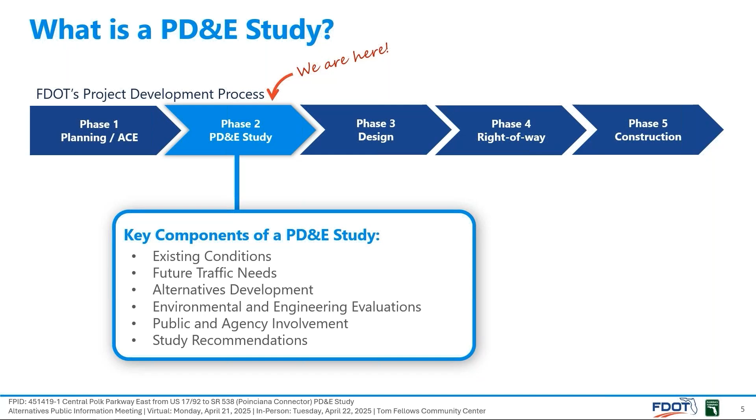The study area is located in northeast Polk County. The study limits begin on US 17/92 south of the Power Line Road extension intersection, which is currently under construction, and extends approximately 7 miles northeast to the future Poinciana Connector, which is under design and will connect State Road 538 to State Road 429. The CSX rail line borders the study area on the west side.

This PD&E study is evaluating a new tolled limited access highway from the extension of Power Line Road to the future Poinciana Connector. Access points are being evaluated with US 17/92 near Power Line Road, US 17/92 north of Ernie Caldwell Boulevard, and the future Poinciana Connector.

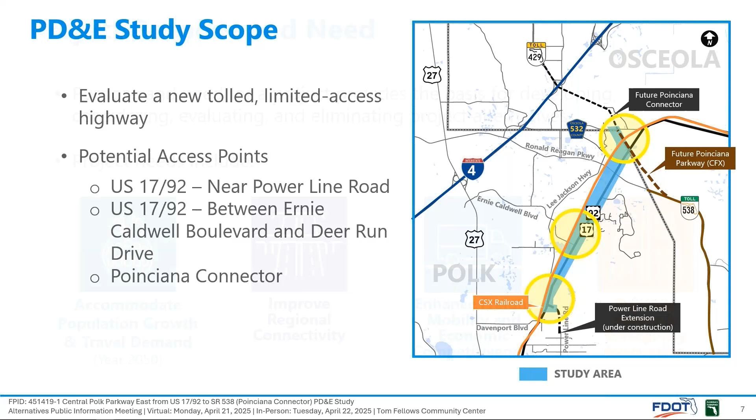The purpose and need for a project provides the basis for developing, considering, evaluating, and eliminating project alternatives. The need for the Central Polk Parkway East includes accommodating population growth and the associated travel demands, improving regional connectivity and overall system linkage, enhancing freight mobility and economic competitiveness, and enhancing safety, emergency evacuation, and response.

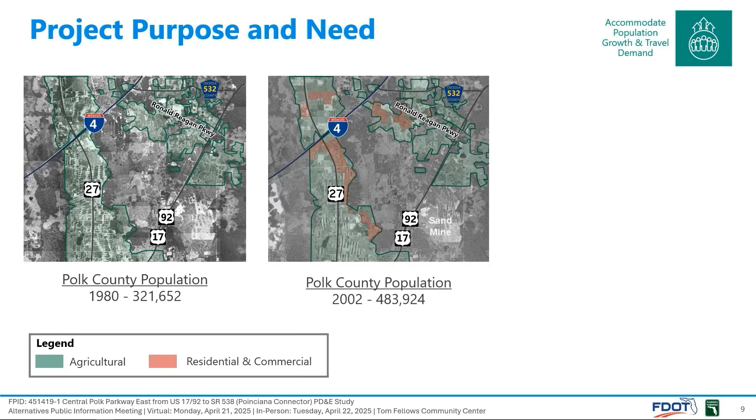Polk County continues to be one of the fastest growing counties in the nation. In 1980, the population of Polk County was just over 320,000 residents, and agriculture was a predominant land use, as indicated by the green shading. By 2002, the population had grown to just over 480,000 residents, and the transition of agricultural land uses to residential and commercial uses was underway, as depicted by the red shading.

The 2020 U.S. Census reported the Polk County population was just over 725,000 residents, a growth of 125%, and the red shading reflects the substantial urbanization of former agricultural areas. Polk County's population is expected to continue growing. Forecasts show that from 2020 to 2050, the number of Polk County residents will grow an additional 52%.

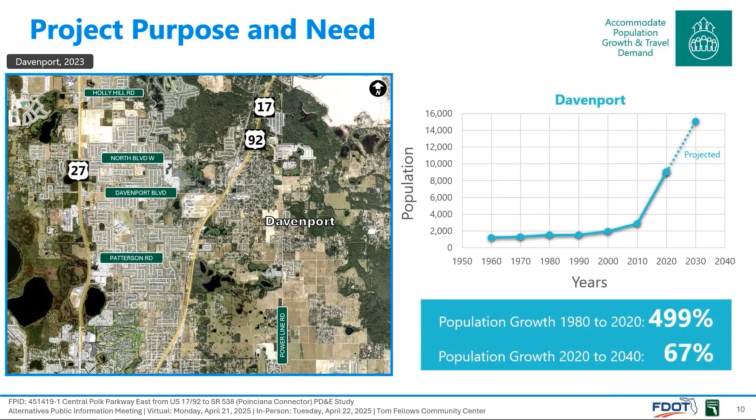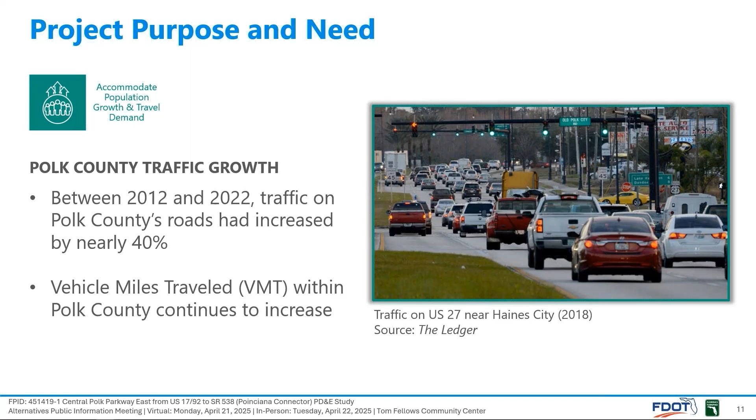Residential and employment growth within the county and throughout the region has increased the travel demand on the roadway network. Traffic on Polk County's roads increased by nearly 40% between 2012 and 2022, much faster than other counties in the region. Additionally, the total vehicle miles traveled within the county will continue increasing. The increased travel demand has led to congested roadways.

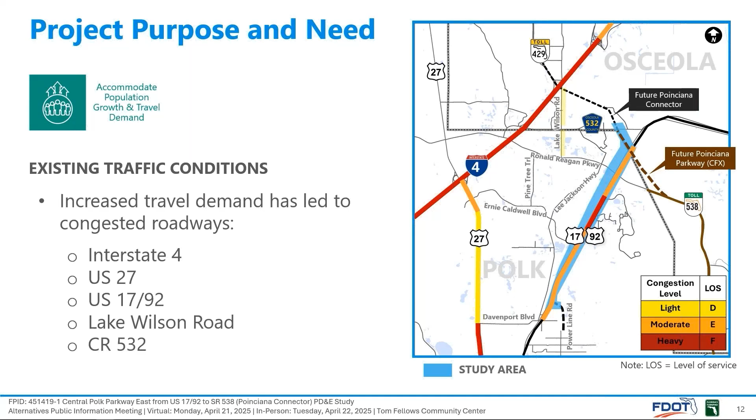Today, light, moderate, or heavy congestion is regularly observed on several major regional roadways, including Interstate 4, US 27, and US 17-92 during the peak travel periods. Congestion also occurs on Lake Wilson Road and County Road 532. The congested conditions on these major regional roadways will continue degrading if no improvements or alternative travel routes are constructed.

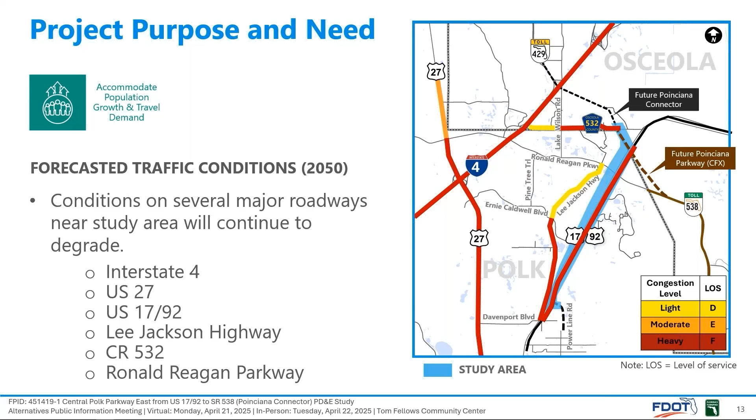In fact, heavy traffic congestion is forecasted for Interstate 4, US 27, US 17-92, Lee-Jackson Highway, County Road 532, and Ronald Reagan Parkway by the year 2050. There is a need to improve regional connectivity and relieve congestion on the local roadway network.

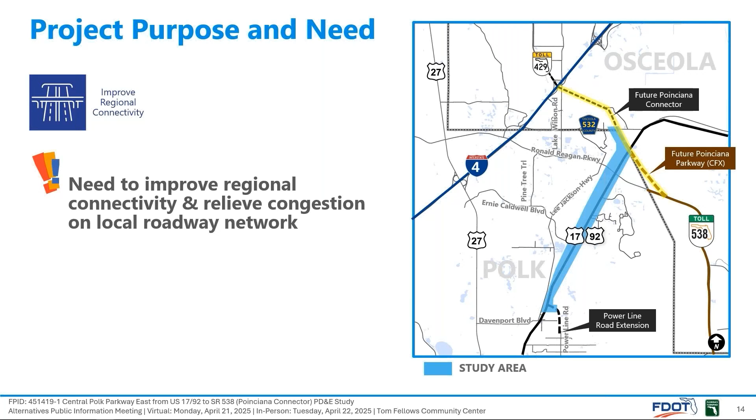Several projects to link the Poinciana Parkway to Interstate 4 are under development, one being the future Poinciana Connector. The proposed Central Polk Parkway East project will connect with the future Poinciana Connector, providing the Davenport area a higher speed option to get to and from Interstate 4 and State Road 429.

With more than 13 million Florida residents living within 100 miles of Polk County, the county's transportation system plays an important role in supporting regional and statewide goods movement. According to 2023 data, Polk County supports more than 81 million square feet of freight-related land uses, more than twice that of nearby counties. The Intermodal Logistics Center in Winter Haven is a major freight activity center with the capacity to process up to 300,000 containers per year. There is a need to improve the overall circulation of freight and goods and support economic development within the area.

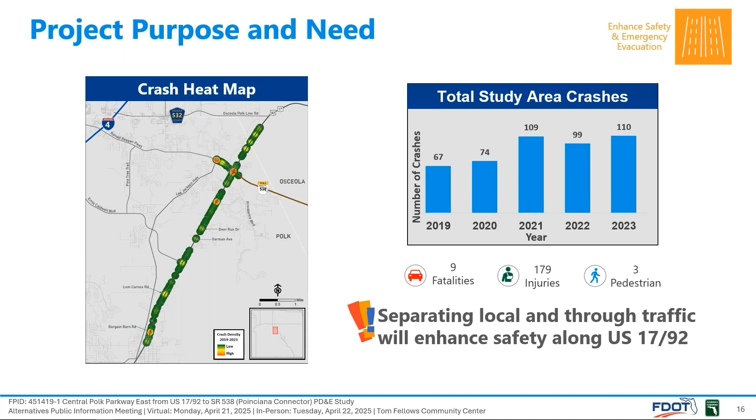Historical crash data between 2019 and 2023 show a total of 459 crashes occurred on US 17-92 within the study area, resulting in 9 fatalities and 179 injuries. Separating the local and regional traffic will reduce opportunities for crashes, thereby enhancing safety along US 17-92. Lastly, there is a need to improve the local and regional travel routes to help reduce emergency response times and enhance mobility during major emergency events.

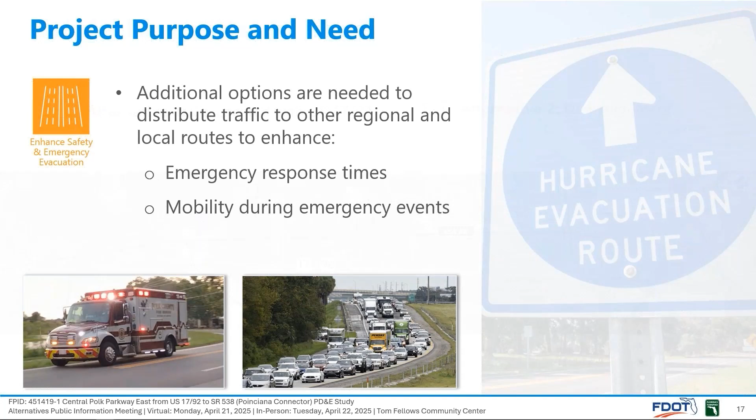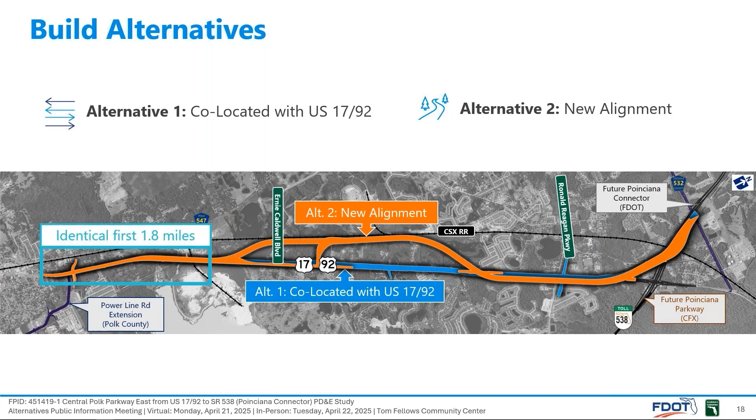North is now oriented to the right on these slides. 2 build alternatives were developed to meet the project's purpose and need: the co-located with US 17-92 alternative, which means the Central Polk Parkway East and the US 17-92 lanes are co-located within the same right-of-way footprint, and the new alignment alternative, which separates the Central Polk Parkway East from the US 17-92 corridor. The 2 alternatives are identical for about the first 2 miles. Now we will provide details on the 2 project alternatives, starting with the co-located with US 17-92 alternative.

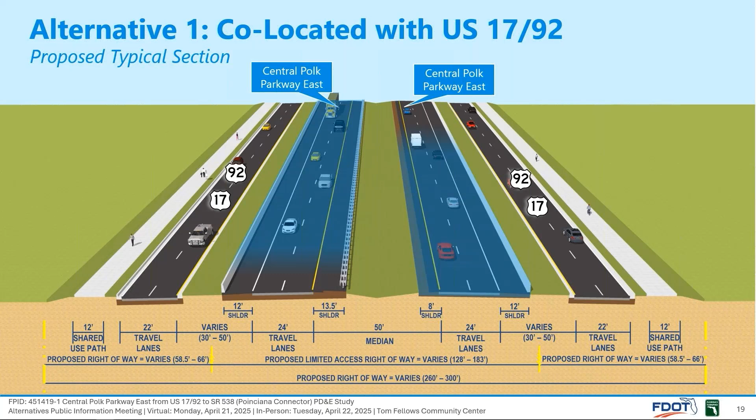The proposed typical section for the co-located with US 17-92 alternative features Central Polk Parkway East as a 4-lane limited-access highway. US 17-92 is reconstructed as a 4-lane frontage road to maintain safe access to adjacent properties and serve local traffic circulation. Shared use paths are provided along both sides of the project to safely accommodate bicyclists and pedestrians. While the existing US 17-92 right-of-way is 100 feet wide, the proposed right-of-way width for this alternative requires between 260 and 300 feet.

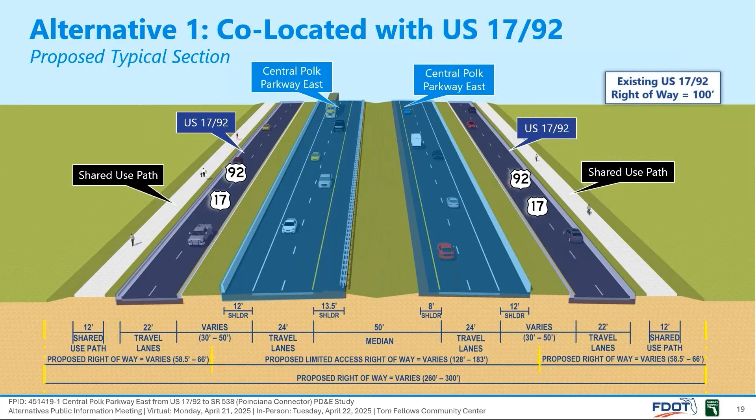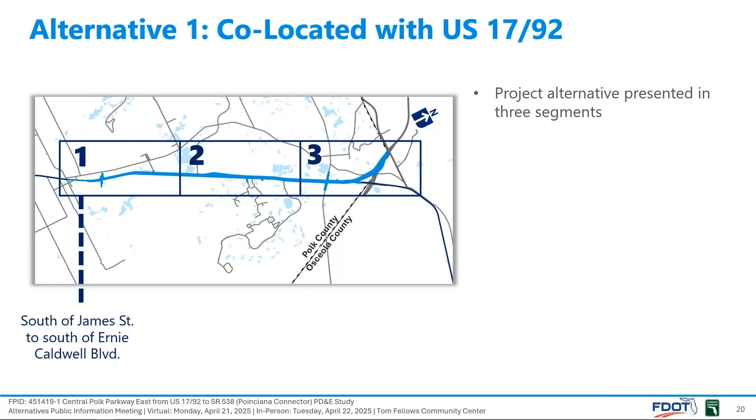We have divided the study area into 3 segments to provide an overview of the project alternatives. North is now oriented to the right on these slides. Segment 1 extends from south of James Street to south of Ernie Caldwell Boulevard. Segment 2 covers from south of Ernie Caldwell Boulevard to north of Providence Boulevard. And Segment 3 extends from north of Providence Boulevard to the future Poinciana Connector.

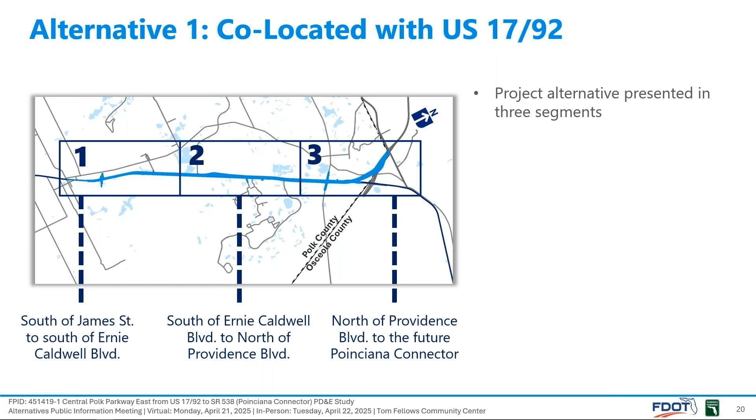The following slides provide an overview of major roadway features, potential access points to and from the proposed highway, overpass locations, and potential right-of-way impacts. To view the project alternatives in greater detail, please refer to the project exhibits posted on the project website or on display at the in-person meeting.

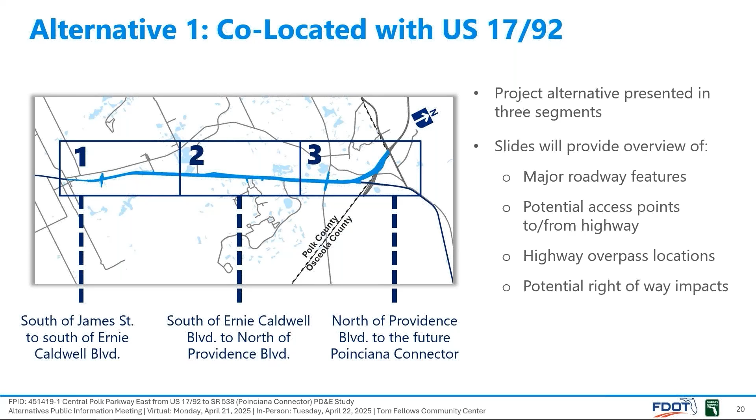The project starts with upgrades to US 17-92 just north of James Street and continues to the north. The US 17-92 intersection with Power Line Road, which is currently under construction by Polk County, is upgraded to accommodate the higher traffic volumes and connect with the proposed realignment of Bargain Barn Road.

Access to and from the proposed new highway occurs north of Power Line Road, after which the highway will be co-located with US 17-92. The highway lanes will be in the center with overpasses at select locations, while US 17-92 will remain at grade. In the northbound direction, US 17-92 widens to 3 lanes to create the slip ramp lanes that form the Central Polk Parkway East highway.

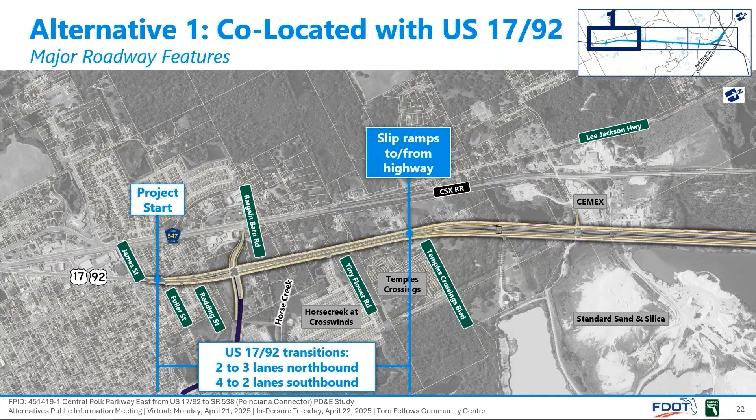While in the southbound direction, after receiving the 2 slip ramp lanes from the Central Polk Parkway East, US 17-92 southbound tapers down from 4 lanes to 2 lanes, and further narrows to 1 lane south of the Power Line Road intersection. Northbound drivers wanting to enter the highway will use a slip ramp on the inside lane of US 17-92.

Southbound drivers exiting the highway will merge onto southbound US 17-92. The highway lanes will bridge over Lem Carnes Road and the CSX Railroad Spur to help maintain higher travel speeds and accommodate safe local circulation. The US 17-92 lanes will remain at grade.

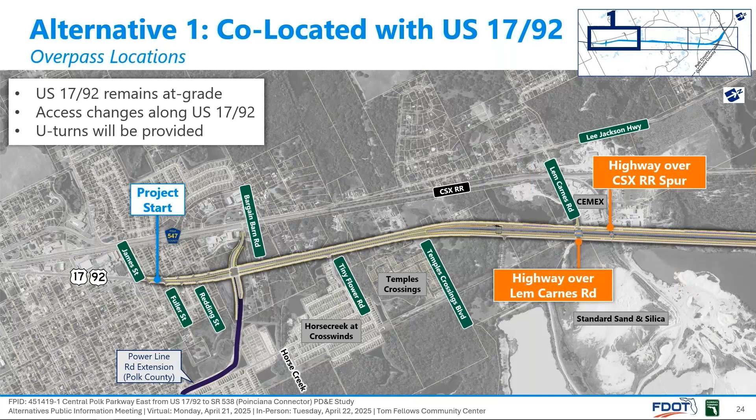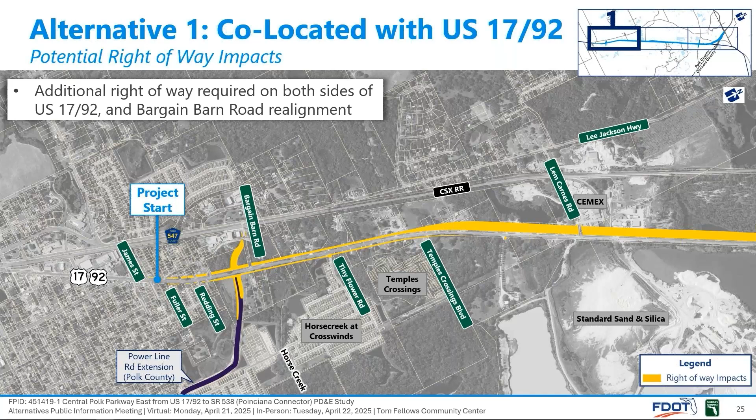There will be access changes along US 17-92. Locations to safely perform U-turns will be provided. Additional right-of-way will be required on both sides of US 17-92 to construct the proposed highway. Please refer to the project exhibits posted to the project website or on display at the in-person meeting to see potential impacts.

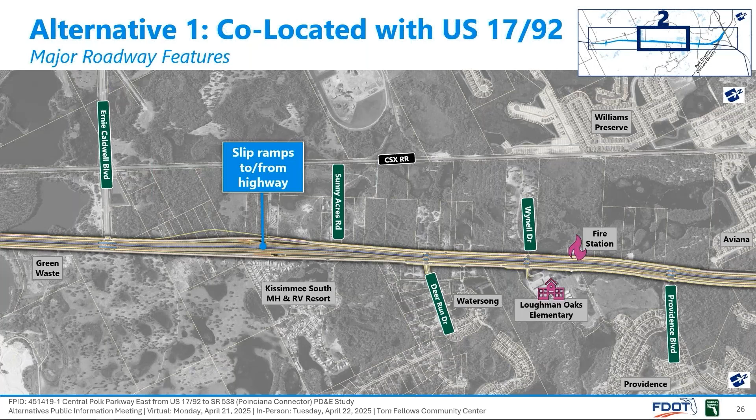We now move to Segment 2 of the co-located with US 17-92 alternative. This segment extends from south of Ernie Caldwell Boulevard to north of Providence Boulevard. The co-located highway continues north along US 17-92. Slip ramps to accommodate access between the highway and the frontage road are provided just north of Ernie Caldwell Boulevard. Similar to the first access points, northbound drivers wanting to enter the highway north of Ernie Caldwell Boulevard will use a slip ramp on the inside lane of US 17-92.

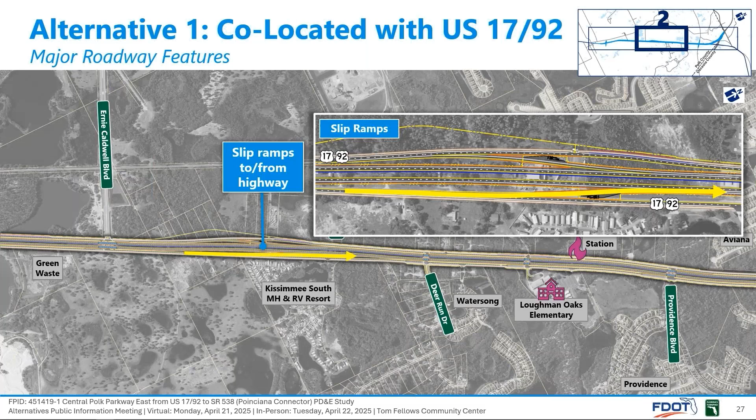Southbound drivers wanting to exit the highway will use a slip ramp to exit and merge onto southbound US 17-92. In Segment 2, the highway bridges over Ernie Caldwell Boulevard, Deer Run Drive, Wynell Drive, and Providence Boulevard. US 17-92 will remain at grade. There will be access changes along US 17-92. Locations to safely perform U-turns will be provided.

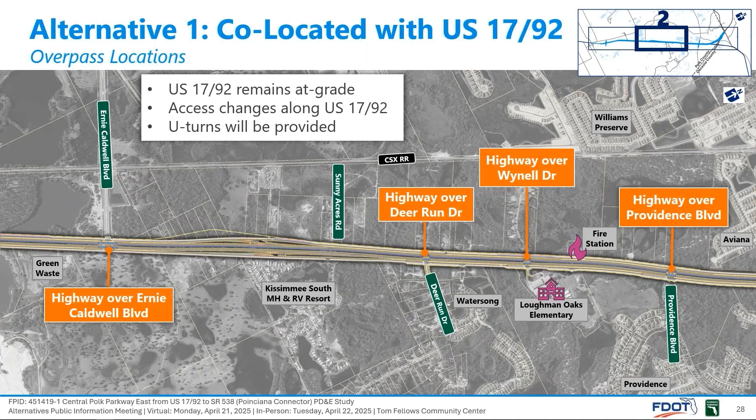The access changes along US 17-92 will affect the Loughman Oaks Elementary School. The bus loop access will remain as it is in the existing conditions. Drivers will be able to turn left and right onto US 17-92. Access at the parent pickup location will change to right out only. Drivers wanting to travel southbound on US 17-92 will be able to make a U-turn at the Providence Boulevard intersection.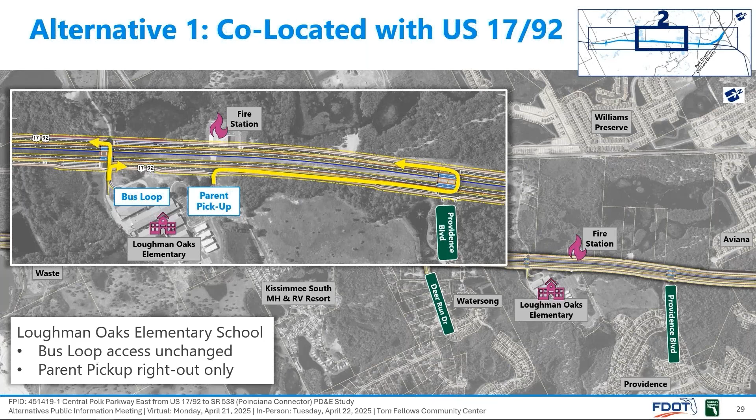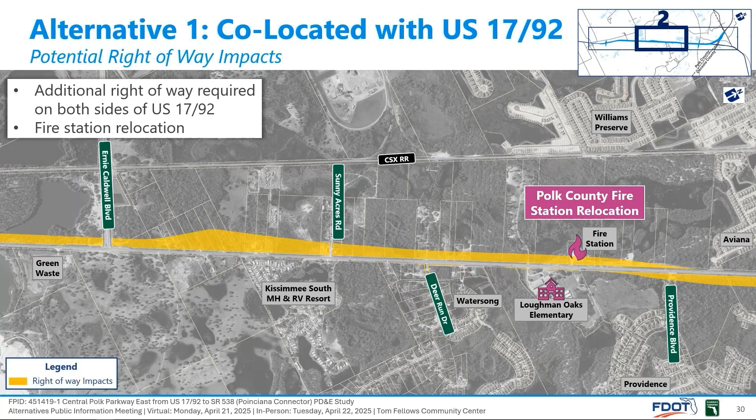Additional right-of-way will be required on both sides of US 17-92 to construct the proposed highway and results in a relocation for the Polk County Fire Station. Please refer to the project exhibits posted to the project website or on display at the in-person meeting to see potential impacts.

We will now move to Segment 3 of the co-located with US 17-92 alternative. This area extends from north of Providence Boulevard to the future Poinciana connector. The co-located highway continues north along US 17-92. North of Ronald Reagan Parkway, the highway lanes separate from US 17-92. The northbound ramp provides a high-speed connection to the Poinciana connector and ultimately State Road 429 and Interstate 4. The southbound lanes provide a high-speed connection from the Poinciana connector. The US 17-92 lanes will continue north, separate from the highway.

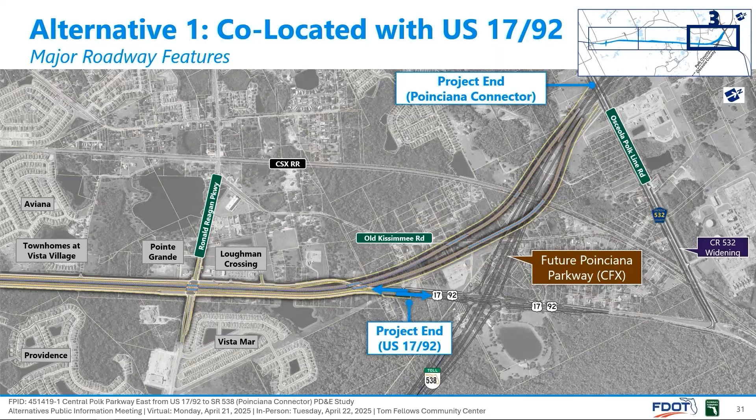This project ends on US 17-92 just before a future Poinciana Parkway interchange that will be completed by the Central Florida Expressway Authority. In Segment 3, the highway bridges over Ronald Reagan Parkway. Once the highway separates from US 17-92, the highway bridges over US 17-92, Old Kissimmee Road, the CSX Railroad, and the future Poinciana Parkway. There will be access changes along US 17-92. Locations to safely perform U-turns will be provided.

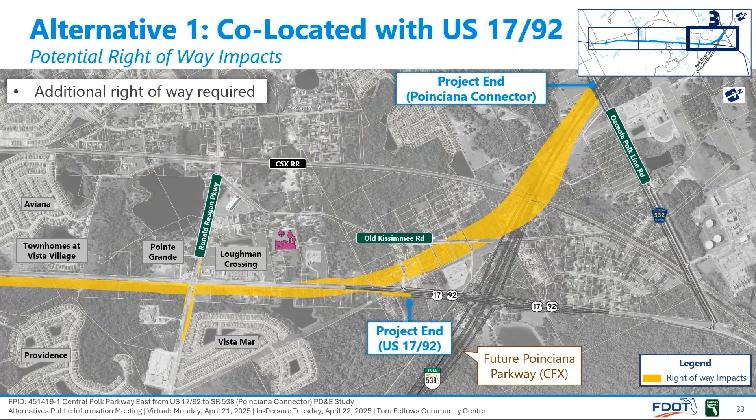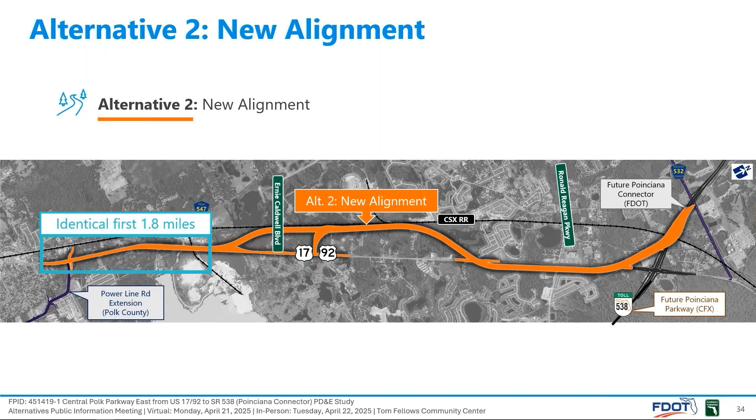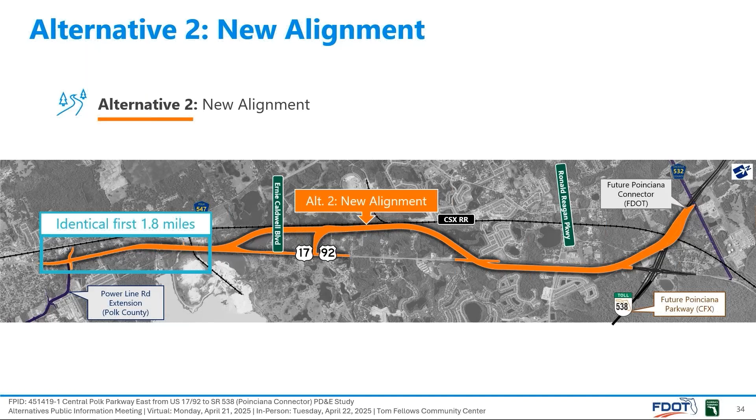Additional right-of-way will be required in this segment of the project. Please refer to the project exhibits posted to the project website or on display at the in-person meeting for potential impacts. The second build alternative is the new alignment alternative. The first 1.8 miles of the new alignment alternative are the same as the co-located with US 17-92 alternative, after which it diverges from the US 17-92 median through the central part of the study area. Now we will provide additional details on the new alignment alternative.

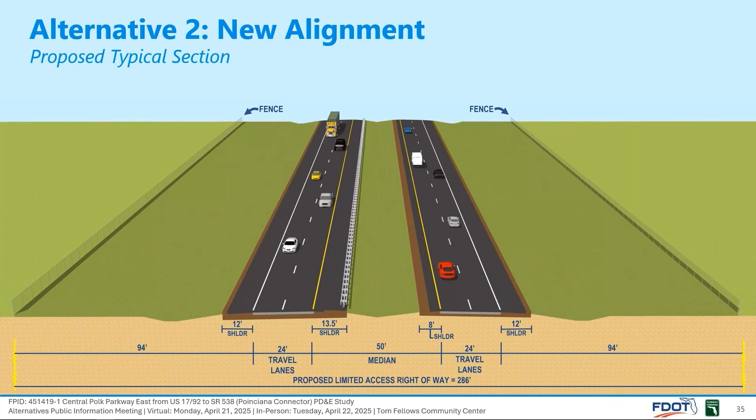The typical section for the new alignment alternative proposes a 4-lane limited access highway consisting of two 12-foot wide travel lanes in each direction, separated by a 50-foot wide median. Shoulders of varying widths are provided along the inside and outside travel lanes in accordance with FDOT design criteria. The total proposed limited access right-of-way width for this alternative is 286 feet.

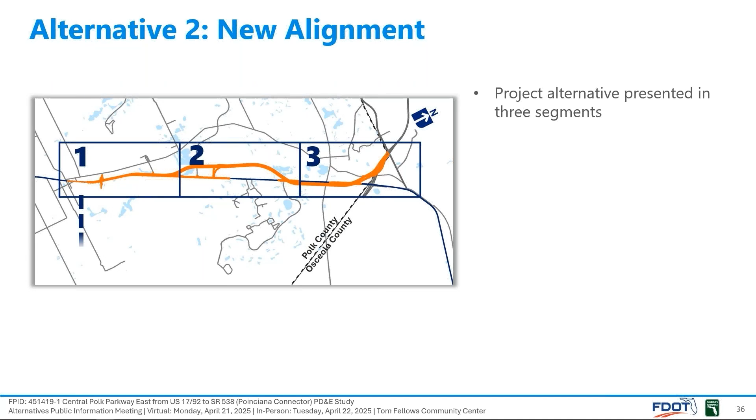For the new alignment alternative, the study area was divided into the same 3 segments as before. The first segment is from south of James Street to south of Ernie Caldwell Boulevard. The second is from south of Ernie Caldwell Boulevard to north of Providence Boulevard, and the third from north of Providence Boulevard to the future Poinciana connector. As a reminder, graphics on the slides are oriented with north to the right.

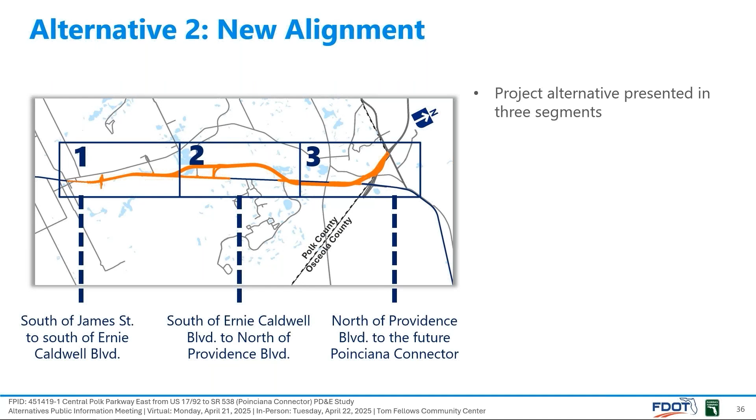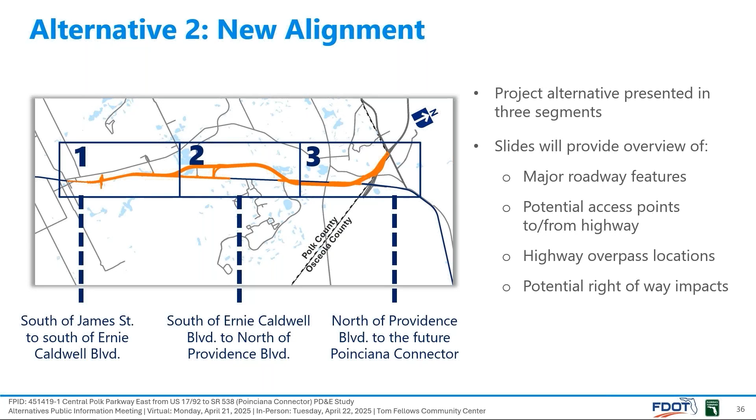The slides will provide an overview of major roadway features, potential access points to and from the proposed highway, overpass locations, and potential right-of-way impacts. To view the project alternatives in greater detail, please refer to the project exhibits posted to the project website or on display at the in-person meeting. The proposed improvements would start on US 17-92 north of James Street and continue to the north along US 17-92. Bargain Barn Road would be realigned to join the Powerline Road intersection.

Access to and from the proposed highway would occur north of Powerline Road, after which the highway would be co-located with US 17-92 for a short distance. This new alignment alternative separates the highway from US 17-92 north of Lem Carnes Road. The highway would bridge over select roadways and environmental features.

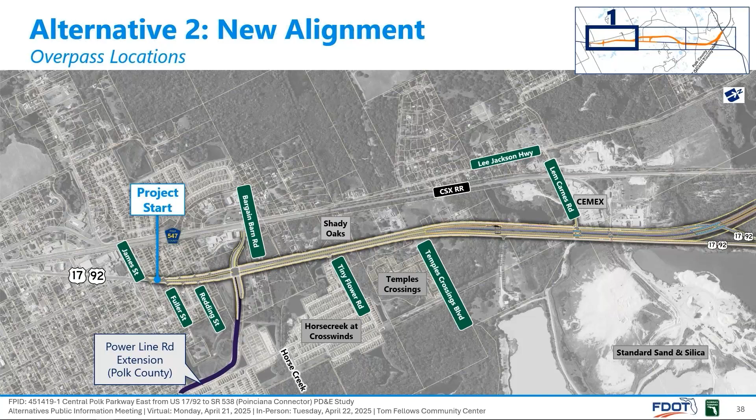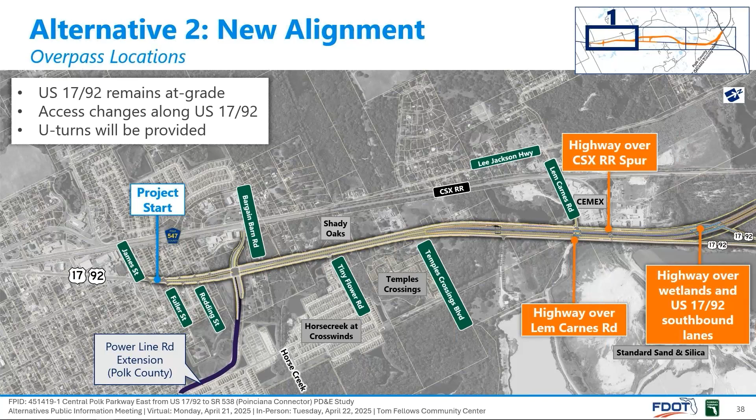In Segment 1, the highway would bridge over Lem Carnes Road and the CSX Railroad Spur. After the highway separates from US 17-92, the highway would bridge over the southbound US 17-92 lanes and wetlands. US 17-92 would remain at grade. There will be access changes along US 17-92. Locations to safely perform U-turns will be provided. Additional right-of-way will be required on both sides of US 17-92 to construct the proposed highway.

Please refer to the project exhibits posted to the project website or on display at the in-person meeting to see potential impacts. We will now move to Segment 2 for the new alignment alternative. This segment covers from south of Ernie Caldwell Boulevard to north of Providence Boulevard. The proposed highway would continue in a northwest direction until it runs parallel to the CSX Railroad. It would then cross back to the east of US 17-92 north of Providence Boulevard.

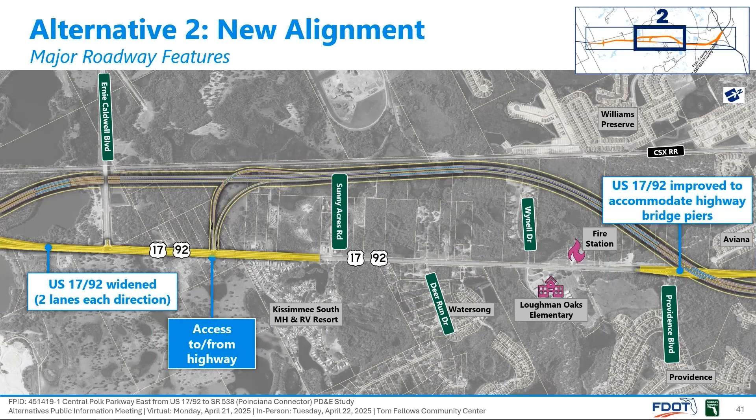Access to and from the highway is provided north of Ernie Caldwell Boulevard. Interchange ramps will serve northbound on and southbound off access. US 17-92 would be widened to 2 lanes in each direction, to north of the interchange ramps. Improvements to US 17-92 to accommodate bridge piers as the highway crosses over US 17-92 would be required at Providence Boulevard. The remainder of US 17-92 in Segment 2 will remain in the existing condition. This alternative does not impact the Loughman Oaks Elementary School or the Polk County Fire Station.

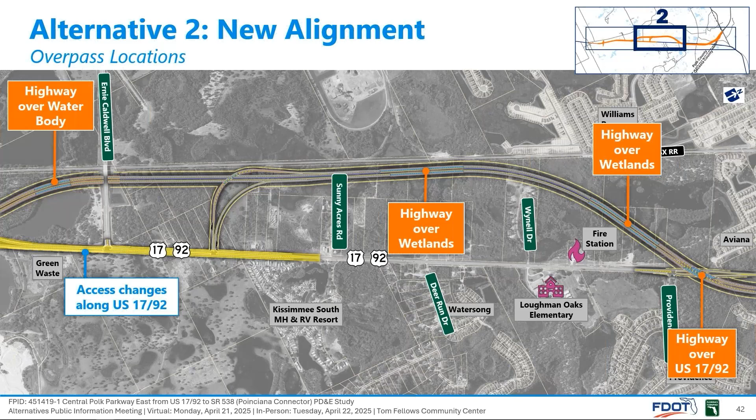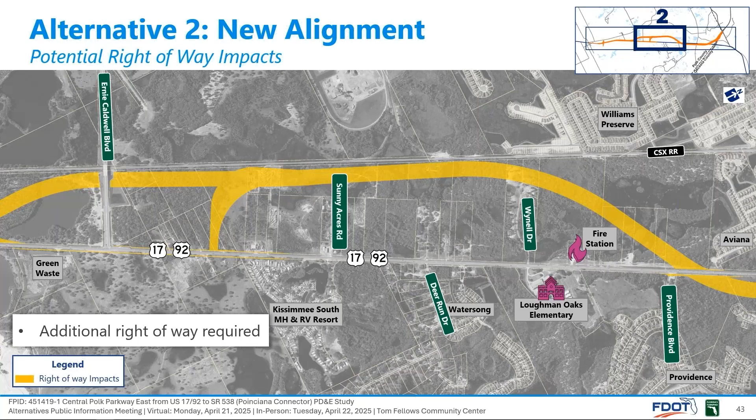The highway will bridge over water bodies and wetlands and US 17-92. Access along US 17-92 would change where the roadway is proposed to be widened. The improvements along US 17-92 at Providence Boulevard will not change the access. Drivers will still be able to turn left into and out of the Providence community. Additional right-of-way will be required for this segment. Please refer to the project exhibits posted to the project website or on display at the in-person meeting to see potential impacts. We will now move to Segment 3 for the new alignment alternative.

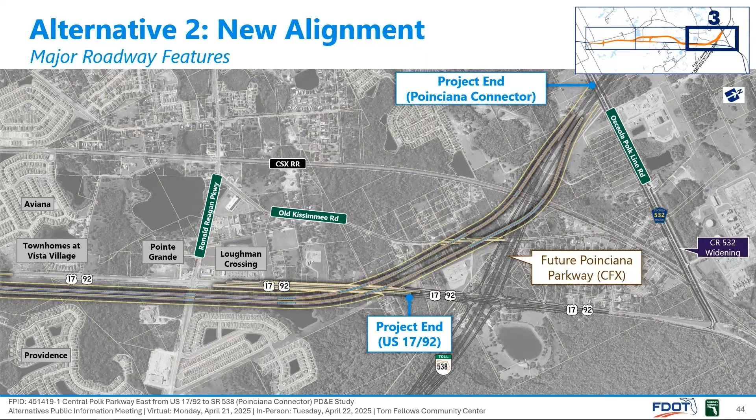This area is from north of Providence Boulevard to the future Poinciana connector. The proposed highway continues separate to US 17-92 to Poinciana Parkway. North of Ronald Reagan Parkway, US 17-92 is widened to 2 travel lanes in each direction. This project ends on US 17-92 just before a future Poinciana Parkway interchange that will be completed by the Central Florida Expressway Authority. The proposed highway will be on a new alignment, separate to US 17-92. Because the proposed highway would be separate to US 17-92, the only access changes along US 17-92 would be where the roadway is widened to 2 travel lanes in each direction.

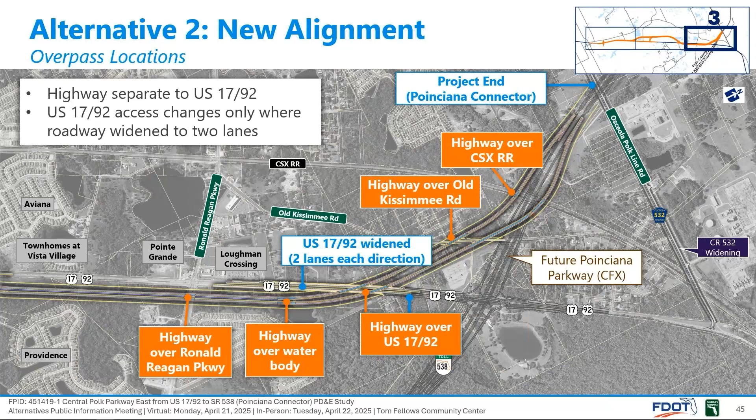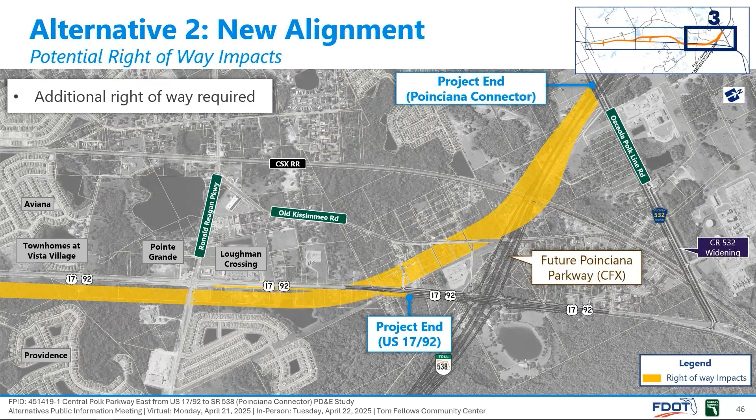In Segment 3, the highway would bridge over Ronald Reagan Parkway, a water body, US 17-92, Old Kissimmee Road, the CSX Railroad, and the future Poinciana Parkway. Additional right-of-way will be required for this alternative. Please refer to the project exhibits posted to the project website or on display at the in-person meeting to see potential impacts. The no-build alternative is an option that is also being considered.

This alternative assumes no improvements other than routine maintenance through 2050. Advantages of the no-build alternative include no environmental impacts, no additional right-of-way acquisition, and no construction costs. Disadvantages of the no-build alternative include increased traffic congestion, slower emergency response times, and inefficient emergency evacuation. Additionally, it does not accommodate future growth or economic development. It does not create a safer travel environment, nor does it meet the project's purpose and need.

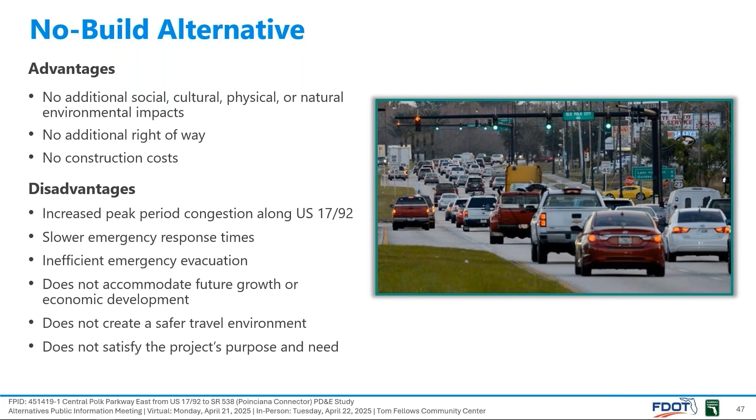Now that we have covered the alternatives, we will review the environmental considerations. As part of the study, Florida's Turnpike Enterprise will evaluate the potential social, natural, physical, and cultural effects of the project alternatives. Every effort will be made to avoid, minimize, or mitigate any adverse environmental impacts. Results of our environmental evaluations, including the consideration of potential wildlife crossings and a detailed traffic noise analysis, will be available for public review.

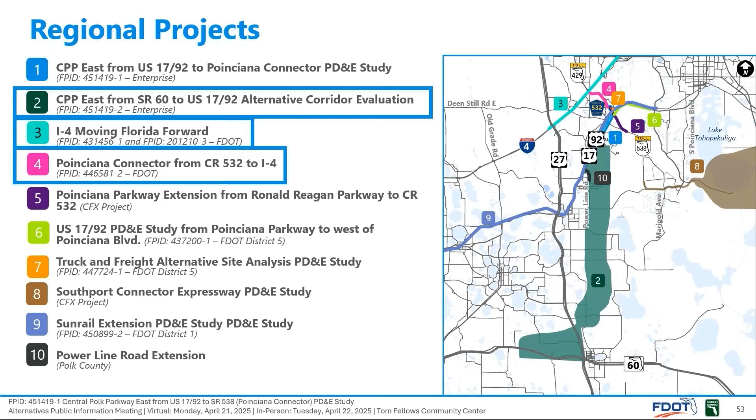The proposed Central Polk Parkway East projects would link to State Road 429 and Interstate 4 via the future Poinciana Connector, and provide relief to US 17/92, US 27, and other area roadways. Drivers would experience significant travel time savings.

After the Alternatives Public Information Meeting, we will select a build alternative based on public input and engineering and environmental analysis. Then it will be refined into a preferred alternative and presented at the public hearing, which is scheduled for the fourth quarter of 2025. Following the hearing, the project will be submitted for approval, with an expected completion date in the first quarter of 2026. Please note that this schedule is subject to change.

We need your feedback. You can provide comments at the project website, centralpolkparkwayeast.com. If you attend in person, you can complete a printed comment form. You may also email the project manager directly or submit your comments by U.S. mail to the project manager. While written comments and questions are accepted at any time, we ask that you provide comments that you may have in connection with this public meeting by May 2nd, 2025.

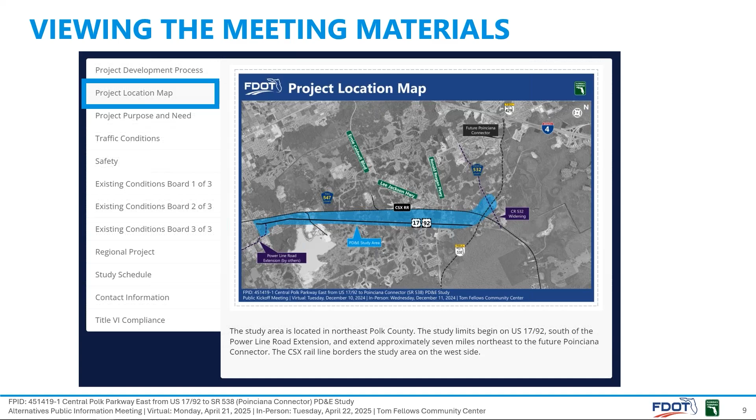So now let's start answering questions, Nathan, that were submitted when folks registered to attend the virtual meeting. Question 1: is this between US 17/92 and County Road 547, which is also known as Lake Hatchineha Road or Lee-Jackson Highway, and where does it extend to?

So, yeah, the proposed improvements start along US 17-92, just south of the Power Line Road extension intersection that is currently under construction. And they extend about 7 miles to the northeast along 17-92, ultimately connecting to the future Poinciana connector. Now, our study area, as we showed in the presentation, generally parallels 17-92 and is bound on the west side by the CSX Railroad. So technically, this project all lies between 17-92 and Lee-Jackson Highway.

Thank you, Nathan. The next question. Question 2, are there any plans for putting more lighting on US 17-92 and traffic lights near Aviana Resort? So regarding roadway lighting, full lighting analysis will be done during the final design phase to determine exactly what type of lighting needs to be provided along 17-92 and the Central Polk Parkway. Now, as far as traffic signals are concerned, you'll see on our alternatives that we are proposing a handful of new traffic signals, but every signal that's out there today will continue to be in place with either alternative.

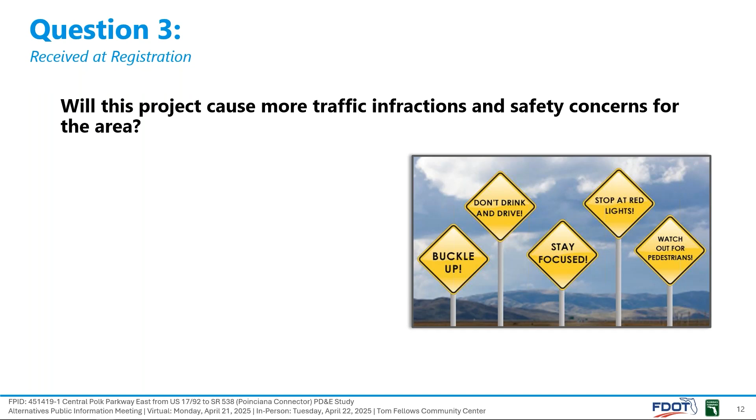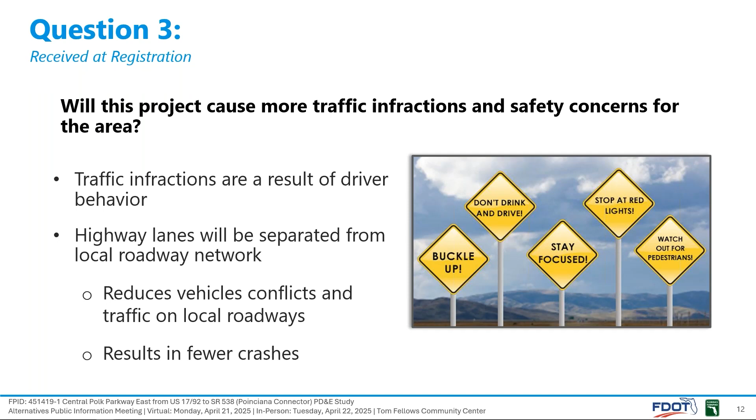Thank you. Question 3, will this project cause more traffic infractions and safety concerns for the area? So traffic infractions are really more of a driver behavior and how the drivers operate. But we are going to separate the longer distance travel; the higher speed, longer distance travel will be on the Central Polk Parkway expressway lanes. Those are the trips that are going to be traveling through the study area to I-4, 429, and places beyond that, where 17-92 will maintain the local travel service. So we believe that separating those two travel modes will produce much safer conditions, fewer opportunities for crashes.

Next, will there be a start and finish date set soon, Nathan? So currently, there is no timeline for construction. However, once the preferred alternative is selected through this PD&E study, which we anticipate completing about April of 2026, we will then get into the design phase and then start the right-of-way acquisition phase once that's funded. We will have a better indication as to when construction will start once we get into final design. Now, this project continues to be a high priority of the Turnpike Enterprise and of all of Florida, so the funding will be reevaluated each year.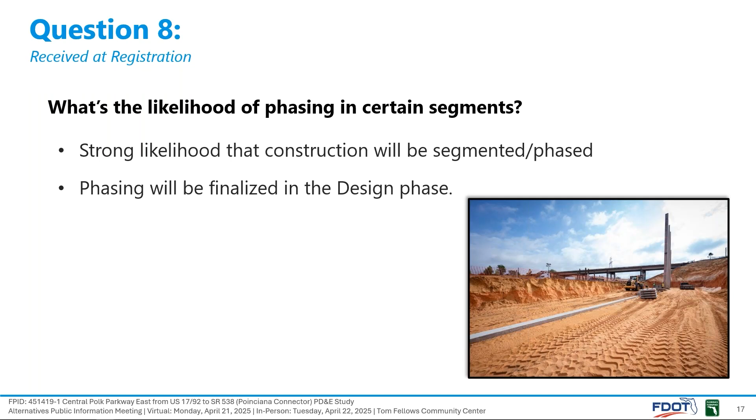What's the likelihood of phasing in certain segments? So major transportation projects like this have a very strong likelihood that the construction will be phased or segmented. We will determine that final phasing plan during final design once we have more information on the extent of each project segment. Okay, so question 9. Would the start of this road be after Powerline Road? So yes, as we showed on the presentation, this project will begin about 1.5 miles north of the Powerline Road intersection that's currently under construction with US 17-92 right now.

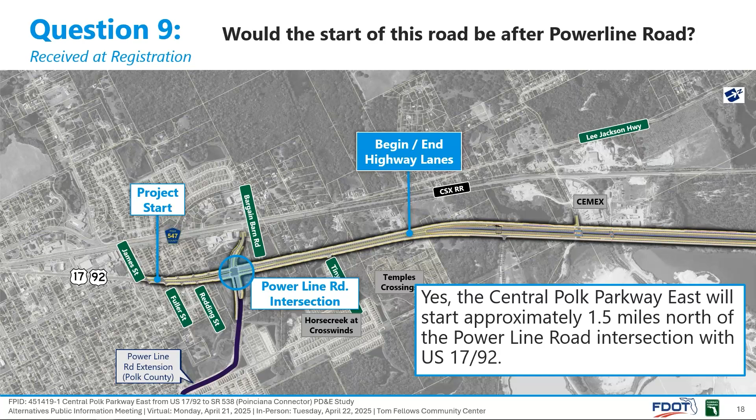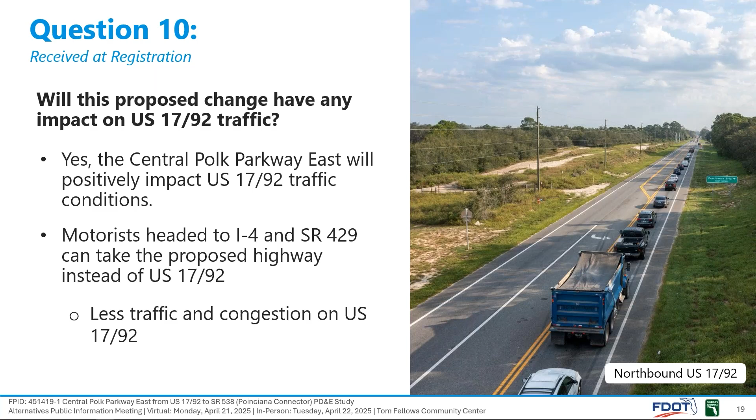Will this proposed change have any impact on US 17-92 traffic? It absolutely will. It will be a very positive impact on 17-92 traffic. Motorists headed to I-4 and to State Road 429 and to locations beyond that will be able to take the proposed Central Polk Parkway lanes instead of US 17-92. That way there will be less traffic and less congestion on 17-92 for folks that are trying to make those local trips to the grocery store, to school. Okay, so will US 17-92 be expanded?

Yes, the two alternatives we showed have expansions to 1792. First alternative, the co-located alternative, widens 1792 to 4 lanes, 2 lanes in each direction, the entire length of the corridor, with the highway lanes being constructed in the median of that 1792 project.

Now, the new alignment alternative widens certain segments of 1792. Like we showed, the southern 1.82 miles are identical, so the southern portion of the project will also be widened to 4 lanes with the expressway down the middle. But then north of that, only portions of 1792 will be widened. However, whatever is done will accommodate or will not preclude future widening of US 1792 when traffic volumes warrant.

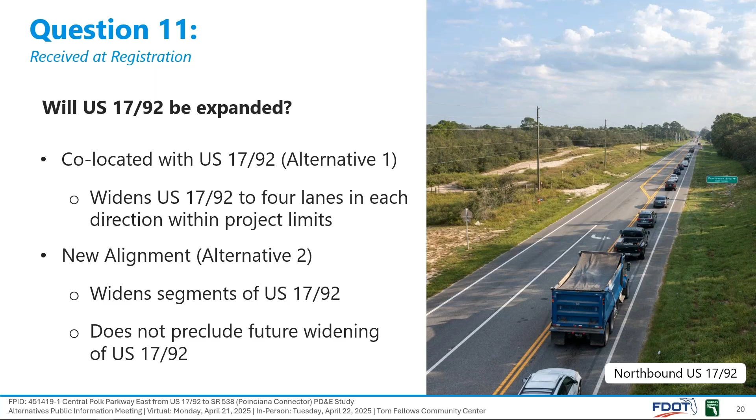Thank you, Nathan. Next question. How will this interface with the Poinciana connector at County Road 532? And County Road 532 is highlighted in yellow on the right of the screen. Yep. So as we showed, we will have direct high-speed ramps that link directly from the Central Polk Parkway East to the Poinciana connector right there in the vicinity of County Road 532. So we'll have a high-speed connection from this project directly to the connector that then leads to 429 and to I-4.

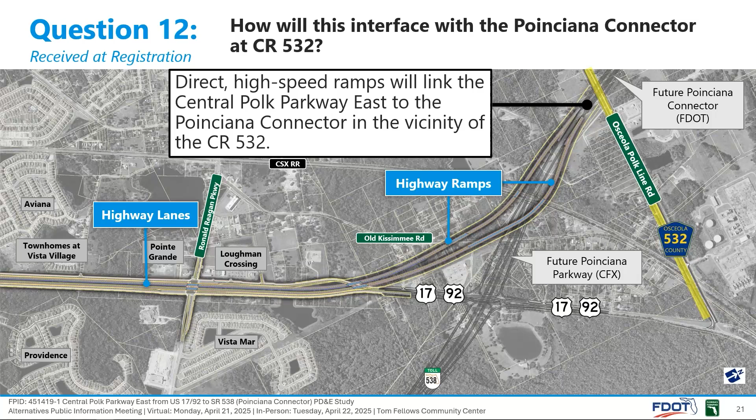As a resident of Horse Creek at Crosswinds, where would access to this project begin? So the highway lanes will begin approximately 1/4 mile north of the entrance to Horse Creek at Crosswinds, as we show here on the slide.

Okay, so there'll be some access changes. Question 15, speaking about access. How will traffic access Loughman Crossing Shopping Mall from the Parkway? So traffic headed to Loughman Crossing will need to remain on the 1792 frontage road lanes or surface streets. But now both alternatives maintain or enhance the current entrances to Loughman Crossing.

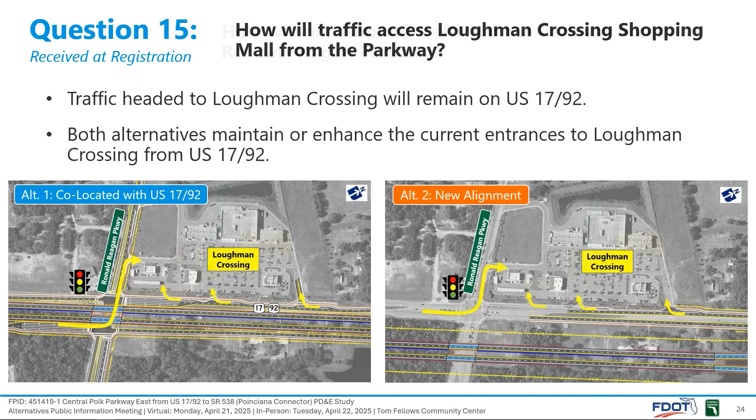Thank you, Nathan. How will northbound traffic on the Parkway access Ronald Reagan Parkway? So similar to the Loughman Crossing access, traffic destined for Ronald Reagan Parkway will need to remain on the 1792 surface streets. The highway lanes of the Central Polk Parkway East project will bridge over Ronald Reagan with the co-located option. Now with the new alignment option, the highway is located adjacent to and on the east side of 1792, but it will also bridge over Ronald Reagan. So access to Ronald Reagan Parkway to and from 1792 will be maintained as it exists today.

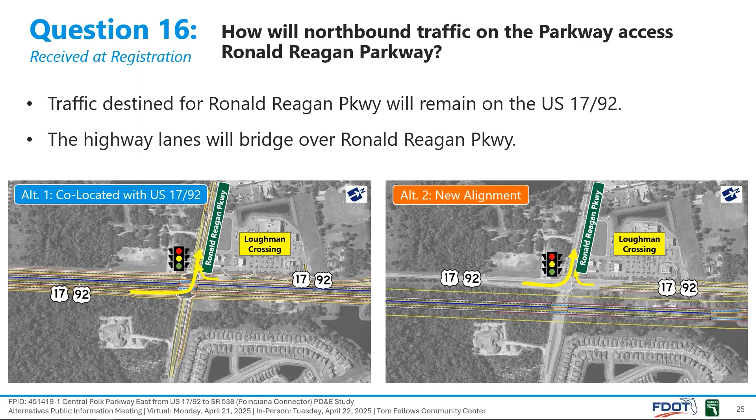Thank you, Nathan. Will the traffic signal continue to exist for access at Providence Boulevard? Yes. As we mentioned, the signals that exist today will continue to exist. So at Providence Boulevard, at your entrance, we will maintain that traffic signal. Now with the co-located option here on the left of the slide, the highway lanes are in the median of 1792 and will bridge over the intersection. But the surface streets of 1792 will be at grade and they will continue to be controlled by the traffic signal so you can get in and out of your neighborhood just like you do today.

Similarly, with the new alignment alternative on the right side of the screen, the Central Polk Parkway will pass over 1792 just to the north of your entrance. So the access as it exists today with the traffic signal will be maintained essentially so that you can get in and out just as you do today.

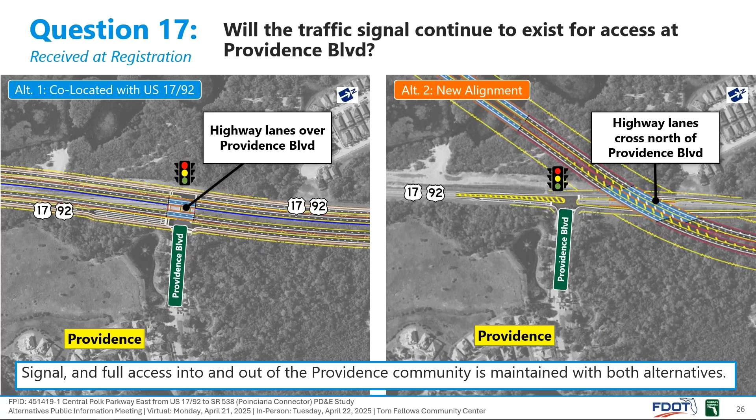Is this new road going to affect the residences in Providence? So neither of the two alternatives we presented tonight will have direct impacts on any home sites within the Providence community. And likewise, other potential impacts like noise will be fully analyzed as part of this PD&E study. And when we come back to the public hearing later this year, we'll have the results of a full noise analysis.

Will the highway be in the median or left or right of current US 17-92? So the answer to this question really depends on which alternative. With the co-located alignment, alternative one, as we mentioned, 17-92 would be reconstructed and spread out, be constructed as a 4-lane facility with 4 highway lanes in the median. So in this condition, the highway would be in the median.

Now with alternative 2, the highway is mostly in the median. Like I said, the first 2 miles are identical, with a widening of 17-92 to the outside, the Central Polk Parkway highway lanes in the median. But just as we said, just north of Glen Carnes, the highway will diverge from the median, and 17-92 will only be widened in certain areas.

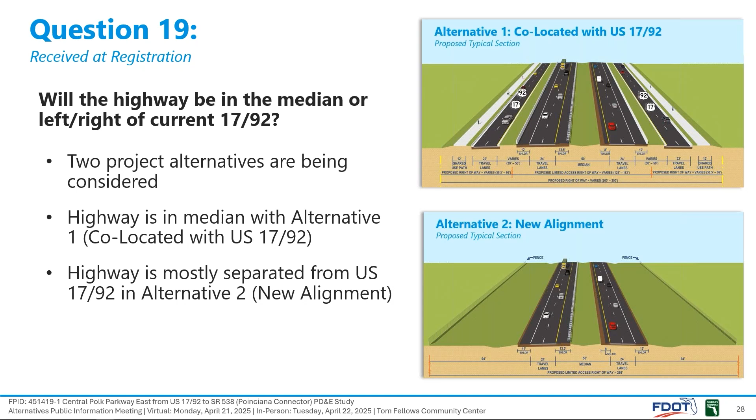Development, schools, apartments are built on main thoroughfares all over Polk County with no turn lanes. Is this being addressed? So this project does not address turn lanes throughout the Polk County region. This project is focused on the 17-92 corridor from Powerline Road to the future Poinciana connector, which is also known as State Road 538. As we've shown, turn lanes along 17-92 are proposed in our project where warranted.

Thank you. Have you considered a future corridor connecting eastbound to State Road 417? There are thousands of families in need of faster roads to Kissimmee, Hunters Creek, Lake Nona, etc. So this project, our Central Polk Parkway East project that we're talking about tonight, connected with the Poinciana connector, then connecting up to I-4, traveling eastbound on I-4 takes you directly to 417. So these projects combined do provide a higher speed connection from the Davenport, Northeast Polk County area to 417 that will get you to Hunters Creek, Kissimmee, and Lake Nona, as your question asks.

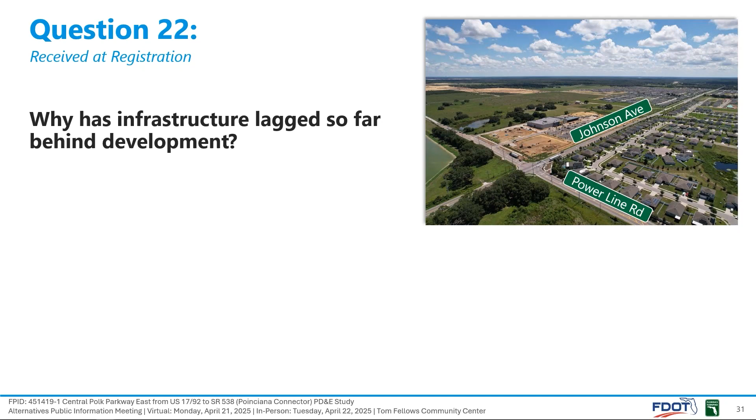I think we're down to our last two questions, Nathan. So question 22, why has infrastructure lagged so far behind development? So as we all know, Polk County is one of the fastest growing counties in the country. In fact, it's been experiencing unprecedented growth these last few years. So private development often is able to move faster than major transportation projects, which require extensive planning, permitting, and funding.

Florida's Turnpike Enterprise and FDOT are actively working with local governments and regional partners to close the gap through long-term phased infrastructure solutions. And the Central Polk Parkway is a key part of that effort. It is being developed to improve mobility, enhance connectivity between growing communities, and support the transportation demands of this rapidly developing region. All righty, thank you, Nathan.

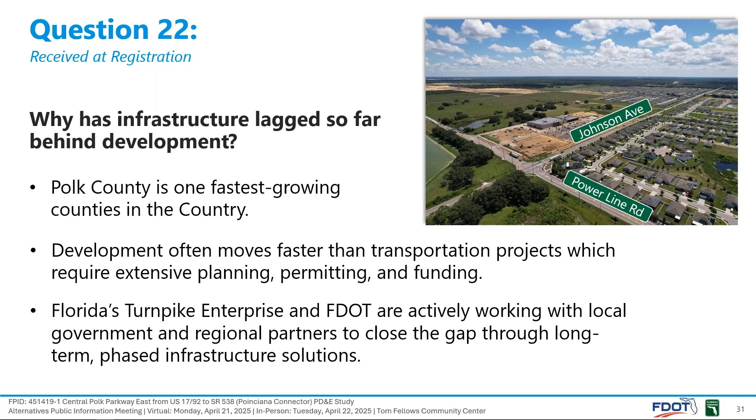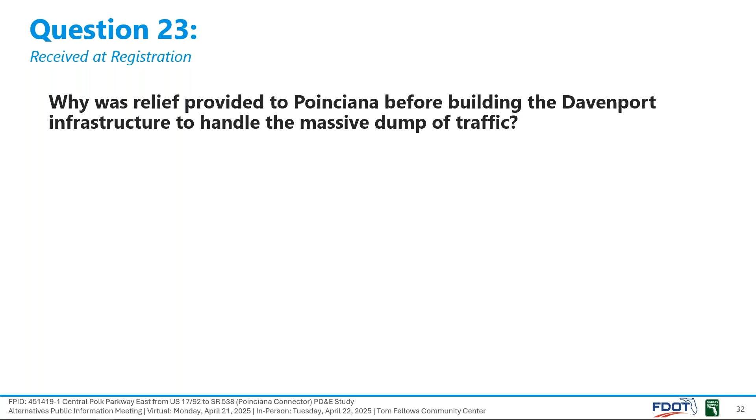So our last question, and thanks for teaming up with me on this effort. Why was relief provided to Poinciana before building the Davenport infrastructure to handle the massive dump of traffic? The Central Polk Parkway East segment from 17-92 to the Poinciana connector, the project we're talking about tonight, is part of a broader solution to distribute traffic more effectively and provide relief across the region, not just in one community.

Our goal is to build a more resilient and connected network that benefits the entire region. We are committed to continuing collaboration with local partners and stakeholders to make sure infrastructure keeps pace with development in a balanced and forward-thinking way. Thank you again, Nathan.

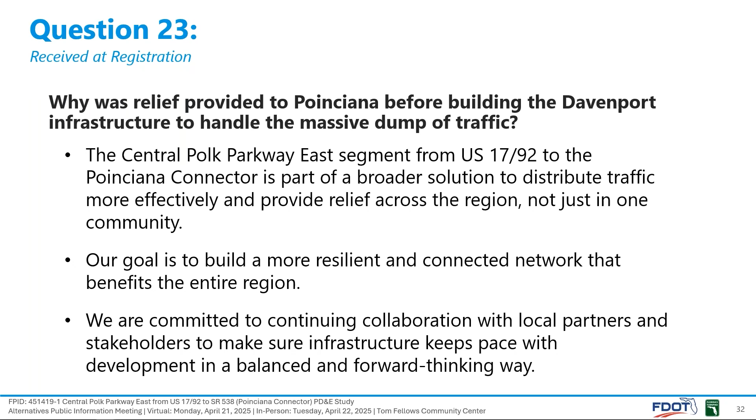We've encouraged comments several times throughout this meeting, and we're going to end also by asking if you still have questions and comments. And I want to clarify that folks may have signed up tonight or this weekend to register for the meeting and may have submitted questions. If they were not answered tonight, you will be receiving a response sometime after May 2nd. So please don't feel that we saw your question and did not respond to it. You will receive a response.

Following the meeting, a recording of this virtual alternatives public information meeting will be made available on the project website. So sometime next week, the meeting will be available in the meeting exhibit room and also under the document section. We thank you for your interest in this project. Remember, you can visit the project website to view the alternatives that were presented tonight and other project information, and also to submit your questions and your comments.